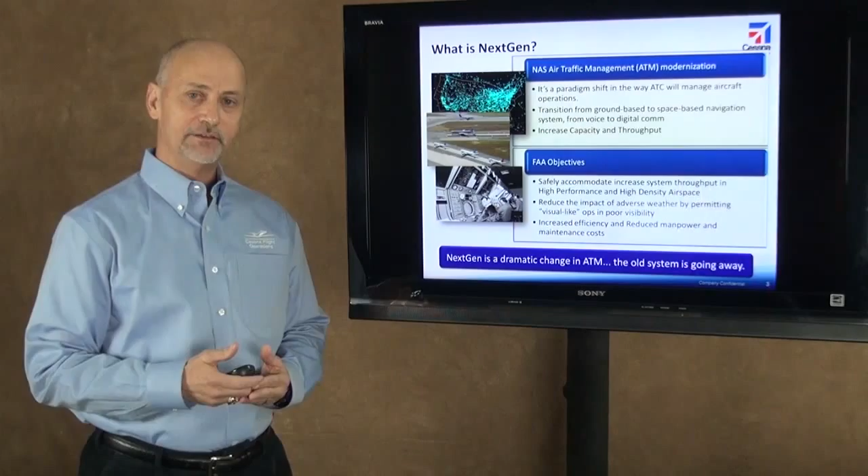The FAA has some specific objectives for the NextGen program. First off, they want to safely accommodate increases in system throughput. That'll help out everybody, especially the high-performance airspace, that's airspace above flight level 340, and the high-density airspaces in the metroplexes. They're also going to use NextGen technologies to reduce the impact that weather has upon that day's operations by allowing visual separation standards even in poor visibility conditions. This is also going to allow for increases in efficiency, reductions in manpower and maintenance costs. Overall, NextGen is a dramatic change in the air traffic management system. The old system is going away.

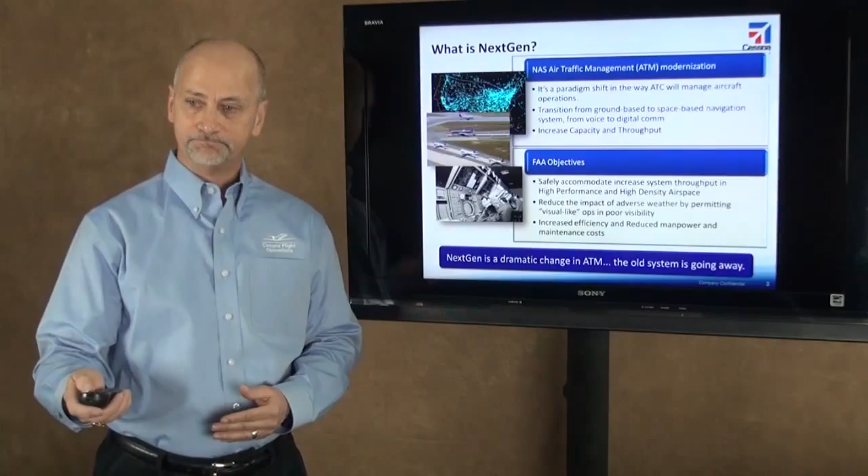So what exactly is changing in NextGen? I mentioned the air traffic control system is transitioning to collaborative air traffic management. That's also been called CATM. Voice communication, which is primarily used today, and digital communication, which is secondary, are going to change roles. Digital communication is going to be the primary way to control aircraft, and voice communication is going to be the backup. I mentioned ground-based navigation, the VORs, the NDBs, the ILSs. Those will slowly fade away as space-based navigation becomes more prolific in the national airspace system.

Passive surveillance or radar technology is giving way to something even better, automatic dependent surveillance. And the way we get our weather information today is extrapolated, and it's going to give way to something a lot better, more real-time interactive weather to allow pilots to have more capability to predict exactly what's going to happen to their flight trajectory.

Today's operations, you could call them federated or independent. Every aircraft out there is flying on its own business trajectory, but that's going to change to more of an integrated system, what we're moving towards called four-dimensional trajectory-based operations, or 4D TBO for short. Let me define that a little bit better. From the beginning of aircraft pushback all the way to where it shuts down, an aircraft trajectory is going to be defined by its latitude, its longitude, its altitude, and its speed, all in relationship to time. What this enables is more synchronization with other aircraft.

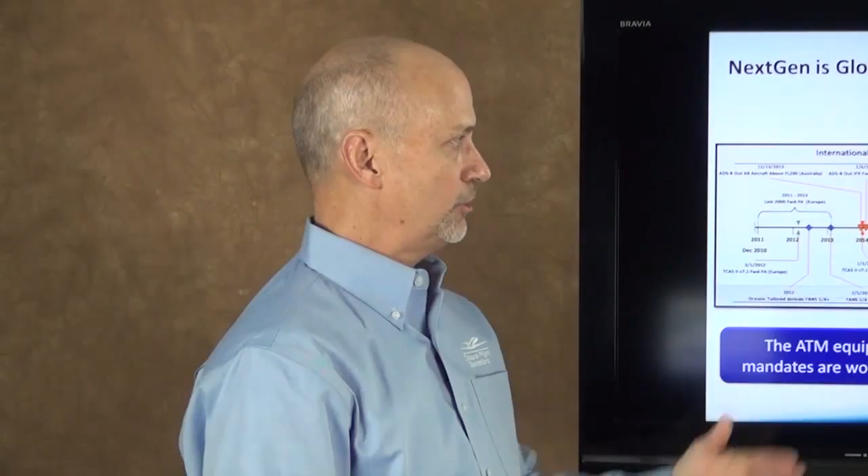Speaking about across the globe, I use the term NextGen, and what I'm talking about is the transformation of the air traffic management system. It's all being modernized. If you look at the sister organizations of the FAA, you can see that NextGen technology is going into place in Canada. It's also going into place, of course, across the North Atlantic tracks. It's over in Europe and in the Far East and in Australia. So these technologies are being implemented today, and we use the term NextGen when we're talking about all of them.

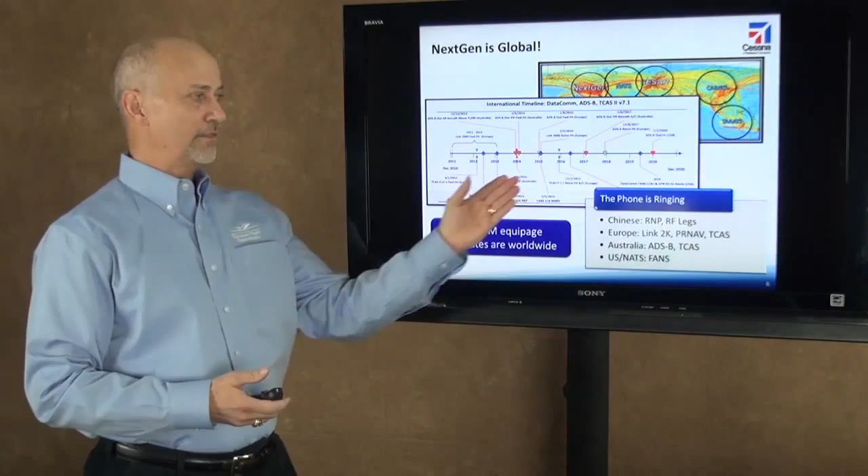If you look at this timeline right here, these are the international mandates and the milestones for data communications, automatic dependent surveillance, and for TCAS 7.1. And you'll notice the one that's all the way to the right, that's actually the only milestone up there for the United States. That's the mandate for ADS-B out for all aircraft by 2020.

So yes, the phone is ringing here at Cessna because our customers are asking us about things like RNP and RF legs, and the Chinese have recently asked about that on their new aircraft, and European customers are wondering, do I need Link 2000? We have permanent exemptions that we're asking for all of our aircraft, but they might still want that technology.

Precise RNAV, or P-RNAV, is a requirement in some airspaces in Europe, and TCAS is also a requirement. In Australia, ADS-B out is mandated for all aircraft operating above flight level 290 in December of this year.

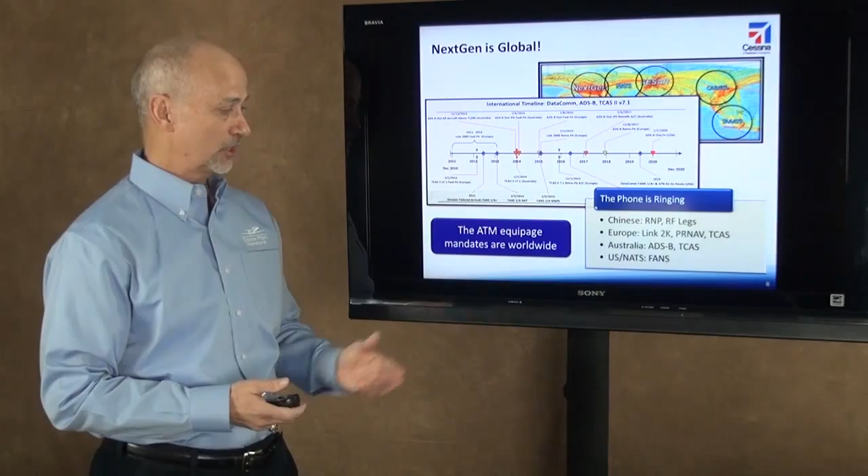And in the North Atlantic tracks, again, FANS technology, data communications, I'll talk more about in just a minute. It's required to operate in the center track, and by 2015, all of the North Atlantic tracks are going to require FANS technology. So the ATM equipage mandates are worldwide.

So now I'd like to talk a little bit more specifically about the technologies that are going to be needed in the cockpit. The communication, navigation, and surveillance, we just call that the CNS technologies. So first off, I want to look at this chart up here, if you will. The vertical lines are dividing up the timeline into 5-year increments. We're looking at block 0, block 1, block 2, and all the way to the right is block 3. 15 years out, the goal of all of this technology is to get to that 4-dimensional trajectory-based operations. Currently, we're in block 0.

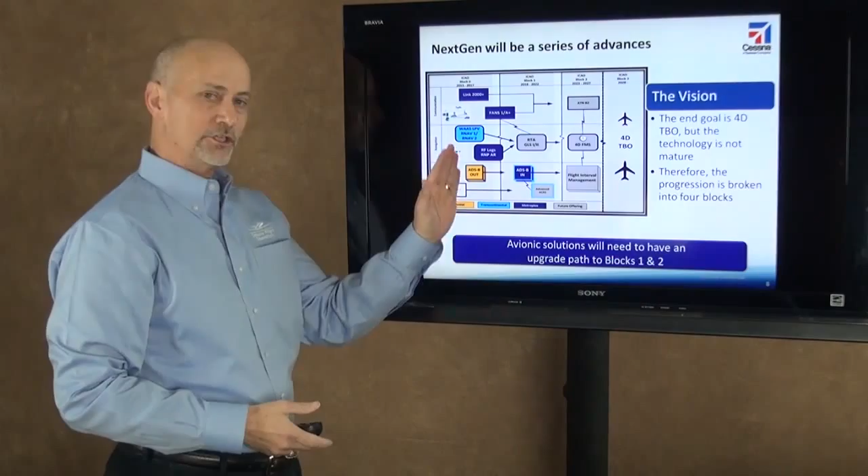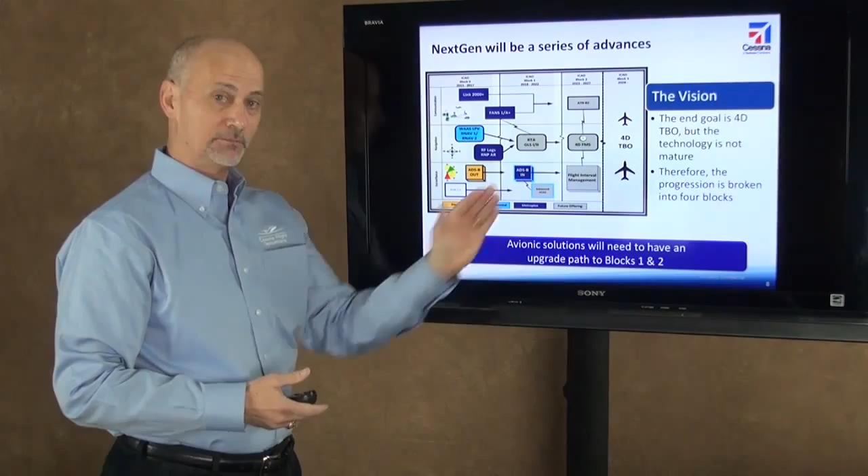Looking horizontally, we're talking about the avionics, the communications, the navigation, and the surveillance technologies. What's important to note is that, again, we're in block 0, and this is both the ground side and the air side. These technologies have to have a roadmap to block 1 technologies and to block 2. So the avionics solutions will need to have an upgrade path to both of these blocks.

Getting into the concept again of data communications. The benefits of data communications are going to be tremendous. All the way from the time an aircraft calls for its clearance, instead of using voice communications, they'll be able to get their clearance automatically uploaded to their FMS. As they taxi out and they get ready for takeoff, if there's a change in the runway departure or the routing, instead of having to call clearance delivery and copy down a new routing, that will be pushed to the aircraft, and the pilot will be able to confirm that that's a good route and automatically upload that.

Once airborne, data communication has more benefits. Automatic check-in, as you pass through the different sectors, the controlling agency will just automatically be in charge of that, and there won't be voice communications required or the need for check-in. If there is a revision to the route because of adverse weather or traffic, that again will be pushed up to the aircraft. The aircraft will be able to display the new routing. The pilots will confirm if that's a good routing and then automatically upload that to the flight management computer. Again, not requiring voice communication.

That's going to reduce a lot of errors that are already inherent in the voice communication system, like hear back, read back errors, or errors because of pilots stepping on each other when they're communicating. The other thing that can happen a lot of times is that when you're taking a clearance and you're writing it down and then you have to enter it in the FMS, you can make errors just in entry. Data communications eliminates that. So it increases a lot of safety. There's a lot of benefits with data communication, and it is the heart of collaborative air traffic management and on the path to 4-dimensional trajectory-based operations.

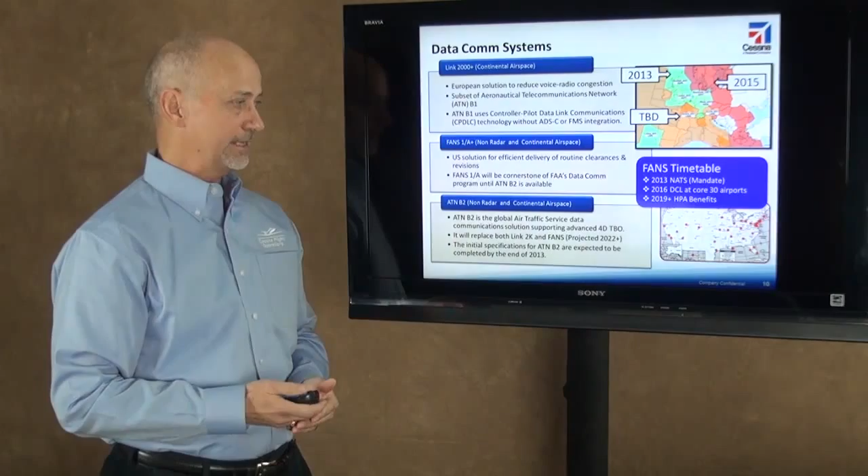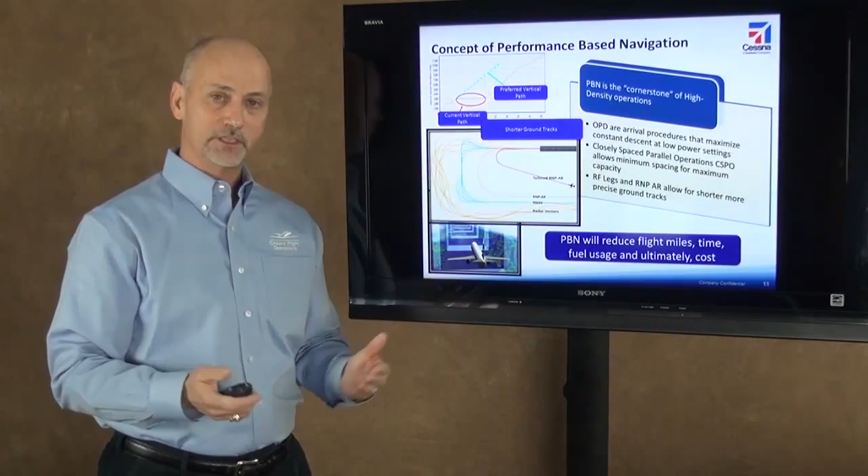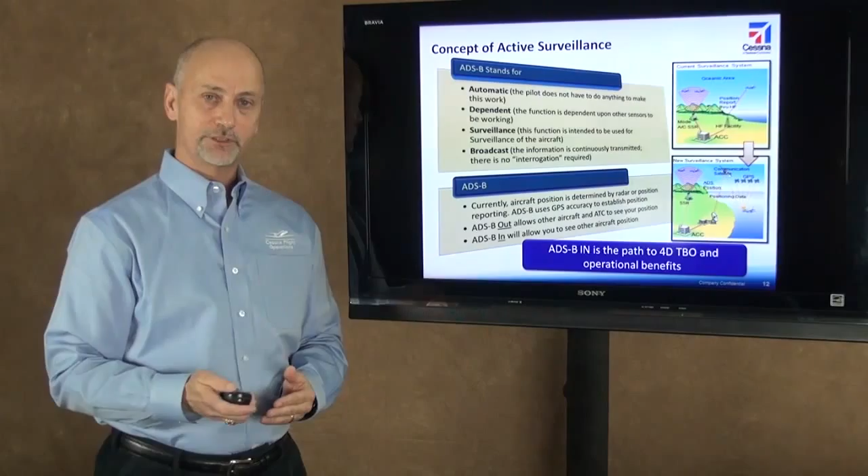That opens the door for even more capabilities, because when an aircraft can precisely see where another aircraft is, then it can merge to get behind that aircraft, or it can pass that aircraft. And that type of capability is going to be called flight interval management. It's going to take a little bit more cockpit avionics flight deck capability, but flight interval management will allow an airplane to follow another airplane based upon a distance or a specific time interval. ADS-B in is the pathway to four-dimensional trajectory-based operation, and really where the operational benefits begin. But that's just the beginning.

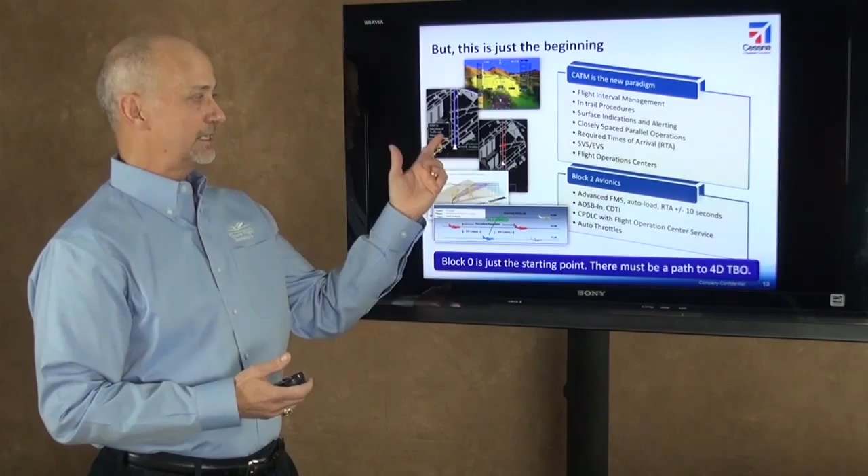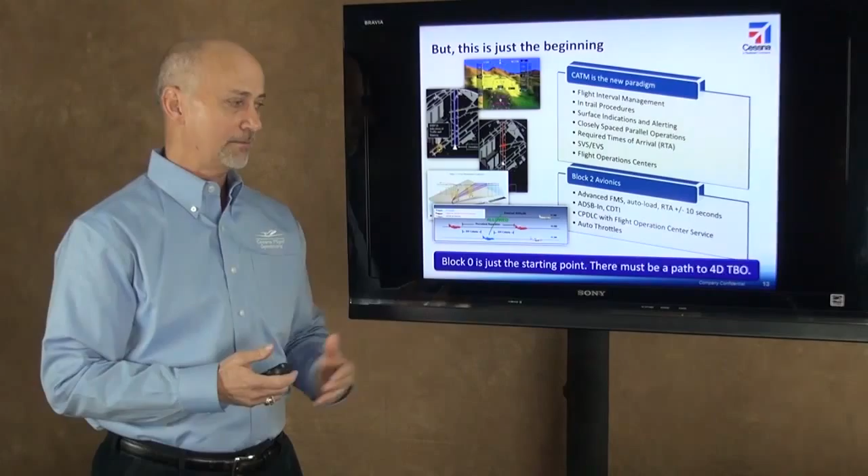As I talked about, those are the enabling technologies in Block 0. We're moving over to Block 1, Block 2, where even more capabilities are going to be available. Flight interval management, I mentioned, in-trail procedures, surface indication and alerting will increase safety upon airport operations. Closely spaced parallel operations will increase throughput at busy airports. In the low visibility arenas, SVS and EVS operations are coming online. All those are Block 2 type of avionics, and so as we move from Block 0, that's just the starting point, we have to have a pathway to four-dimensional trajectory-based operations.

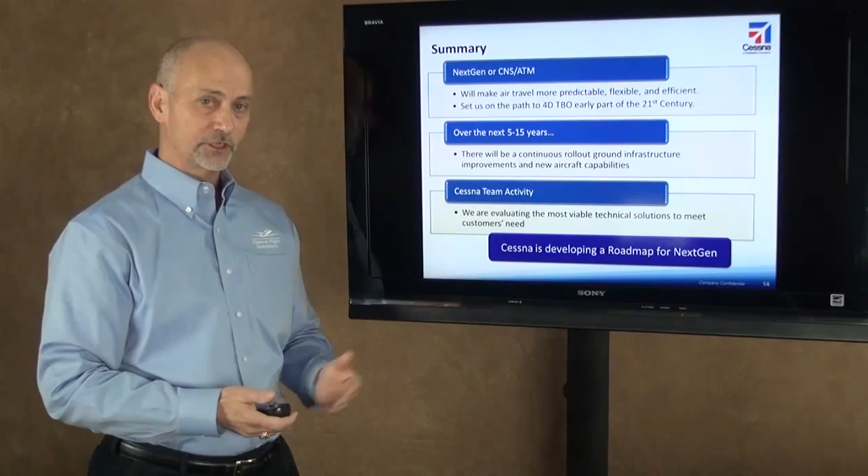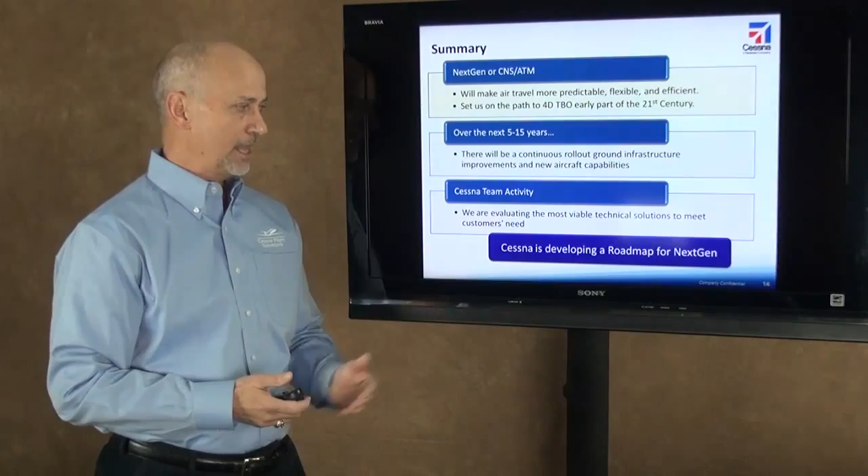So just to sum up everything here, NextGen is the technology that's going to make air travel more predictable, flexible, and efficient. It also is going to set us on a pathway to 4D TBO in the early part of the 21st century. This is going to enable our customers to fly where they want to go, when they want to go, and how they want to go. Over the next 5 to 15 years, there's going to be a continuous update and improvement in the ground infrastructure, and also a corresponding increase in new aircraft capabilities. So the Cessna team, we're very active here. We're working to evaluate the most viable technical solutions to meet our customers' needs.

So I hope today's briefing has given you a good overview about what NextGen is.